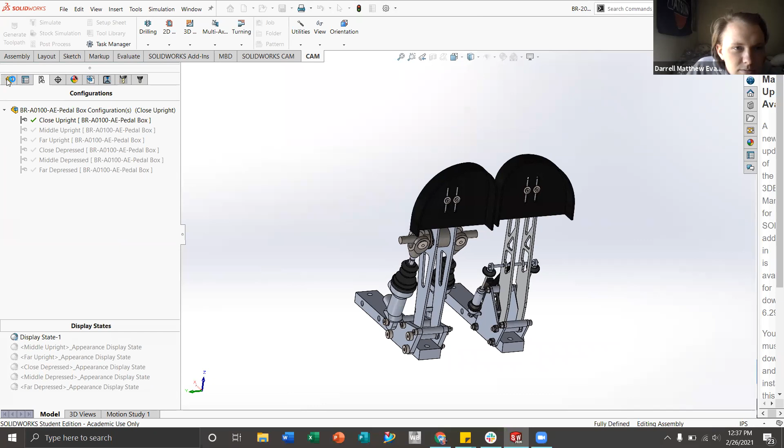I'll let you guys take a look at this and see what we have here. It's kind of self-explanatory - you have on your right the accelerator pedal, on the left the brake pedal, like a normal car. Me and my team have been building this up over this year as well. We continue to develop it every year into what it's been. This right now is really nice.

What we have going is an adjustable pedal box. You can see these pedals themselves can be moved from the forward position to the middle position and then to the rear position, as well as with the brakes. Then these will be attached to a floor that then goes in the car. That's a pretty cool thing we've done as well. You can see it gets very complex, so you get a lot of hands-on experience with this club.

So I'm just going to go ahead and close that up, and then open our new assembly. However experienced you guys are, this is the basic window of SolidWorks right here.

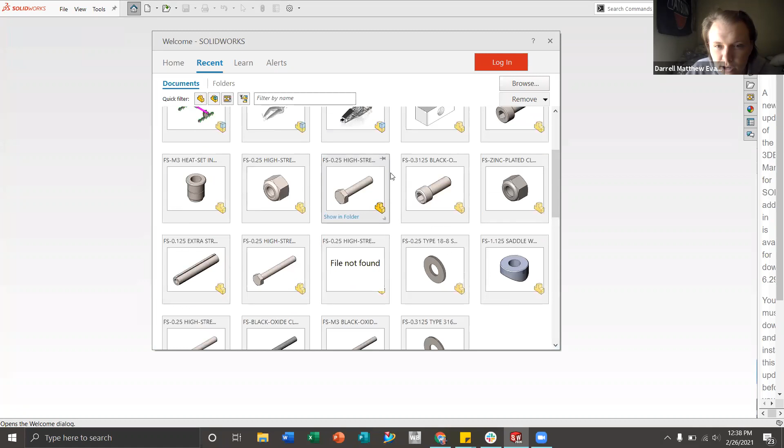You have a little bit of some tools as well as some management stuff as far as SolidWorks goes up here as well. If you hit the home button, it pops up - usually this is the window that loads up. You have here, you can go to recent to see all the recent things that you've done, and then there's alerts and some other introductory tutorials you can see here.

With this, I'm just going to go ahead and close this. Then in this guy, you can make a new part or assembly. If we go ahead and hit it, you have a new part, assembly, or drawing. These are sometimes really good to use if you're creating something new and not making it of an existing assembly. An assembly is just a collection of parts - that's all it is, you just put it together, and we'll go through that a little bit more.

Now what I'll be doing is opening the steering assembly. This is the other kind of assembly that I work on. As you can see, there'll be a lot of parts, but it's not too crazy.

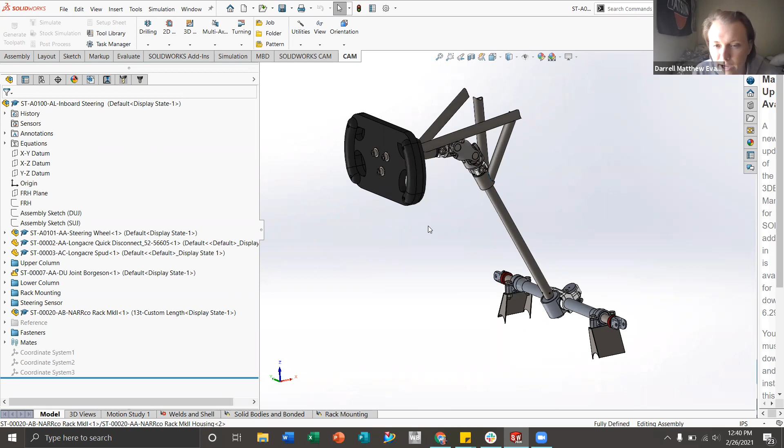This is a goal - we want to try to help you learn a little bit of CAD. If you are interested, you could definitely look at joining the team, and that's where we teach a lot of people. We're all trying to either get a job or progress ourselves as engineers, and CAD is a good way to do that, gives you good stuff for your resume as well.

So with that, what I'll be doing is going over how we build a U-joint assembly, as well as modifying this piece right here. I'll show you how we go about it - rather than creating new parts, we actually design within our assemblies, and that way it makes everything a lot smoother and nicer to work with.

To take a look at this, what a U-joint is - you can kind of see it takes the steering wheel, which I'll highlight for you guys, that's that guy right there in blue. And then we have our rack, which is down at the bottom, highlighted in blue as well. So what this does, obviously, as you turn the steering wheel, it'll then take - let me go ahead and hide this guy.

Go ahead and hide this guy.

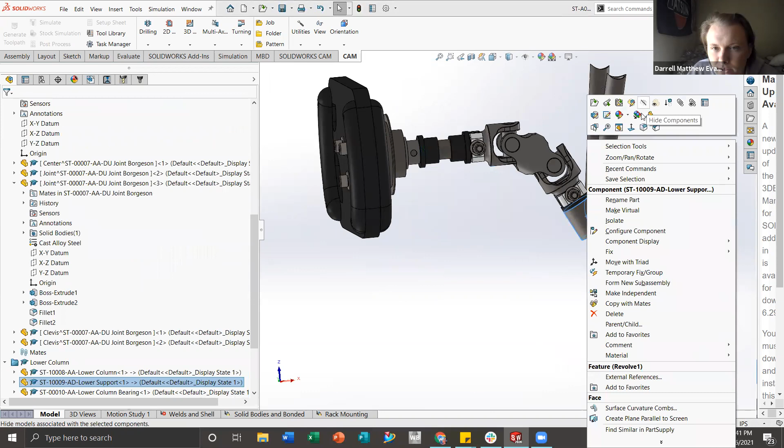So it takes this input shaft right here, which is connected to the steering wheel. It goes into this device, and this is called a U-joint. It takes rotation from one input and then it transfers that rotation into the other output shaft. And so the output shaft is here, it's connected to that U-joint, and then connected to what is called the

steering rack. And so then what this does is it will move left or right as you turn this, because it has a gearing system. And the gear is called a rack and pinion, and that's where it gets its name. It is a steering rack because of that type of gearing it has. And then it creates a linear displacement and will move the tires left or right to steer the car

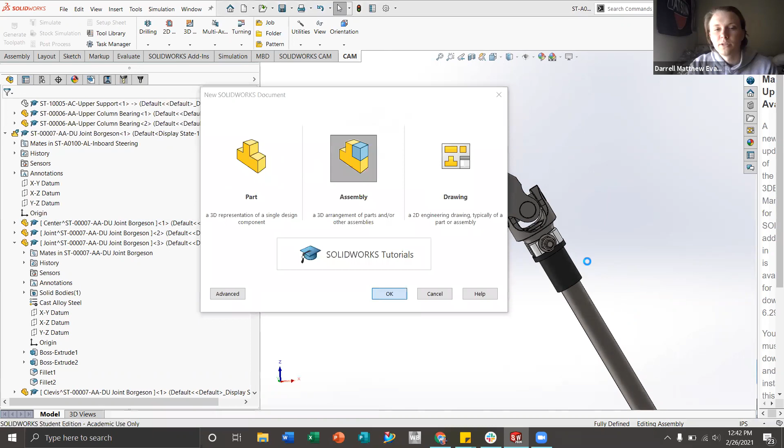in the desired direction. So what we're going to be doing right now is we're going to be changing up this U-joint a little bit into something just a little more different, just because we're going to be transitioning to something else. So with that, what I'm going to do is I'm going to go to new, and I'm going to create a new assembly because I already have these parts already created. And so this way I can show off some of the assembly portions of SolidWorks.

All right, so with this, sometimes it asks you to begin an assembly. And you can usually go through this and kind of insert some stuff as well as possibly create a layout sketch. But that's not what we really want, so I'm just going to go ahead and cancel that. And then now we're going to be left with this really blank template.

I'll go ahead and show these guys. How I show these planes is I right click on the plane over here and then hit this little eyeball which says show, so you can see here. And then I have these hidden on mine, so I'll just go ahead and show those. And then you can kind of see we got our X, Y, and Z.

These are a little bit different in the SolidWorks that you may have. Our team uses special text that then calls it the XY, the XZ datum, and the YZ datum. We do it based off this coordinate system. You can kind of see here at the bottom left, and we just do that. It kind of just makes everyone's CAD very centralized.

As well, if you want to rotate through different views, what you can do is hit spacebar, and spacebar will pop you up into this little square looking thing. And then say you wanted a view from up here, you can kind of see in the top right. Oh, here, I'll go with that. So this is an isometric view.

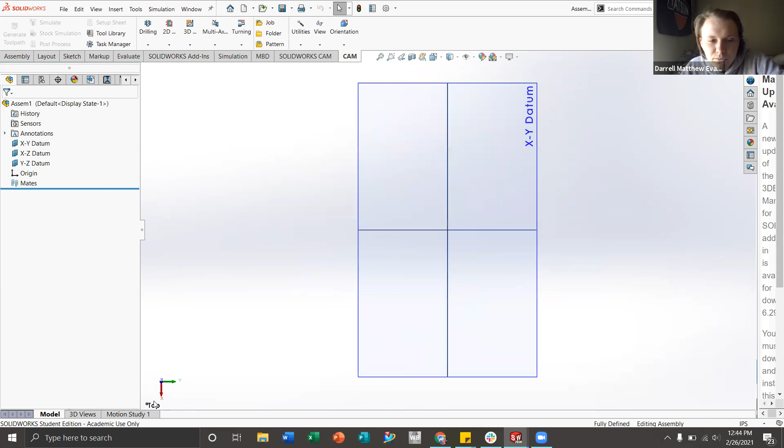As well, if you hit Control-1, you'll see in the bottom left we're at front view. Control-2, we're in the back view. Control-3, left view. Control-4, right view. Control-5, top. Control-6, bottom. And Control-7, which is isometric, which gives you that nice 3D view.

As well, if you use the middle mouse button, you can freely rotate around any part. And sometimes you might get a little confused, so you can always just hit spacebar and then pop to whatever view you want, as well as just hit Control-1 through 7 to whatever view you wanted.

As well, you'll see me zooming in and zooming out a lot. This is just your scroll wheel, so if you pull towards, you go closer, and push away, you go farther. As well, if you wanted to zoom on something over on this side, you would instead zoom towards that and put your mouse over there.

And so in case you're like, oh no, where'd all my stuff go, as long as you just hit Control-1 or 2, 3, whatever one you want, it'll pop you back to your main thing. And so with that, what I'm going to do is I'm going to start to build our assembly.

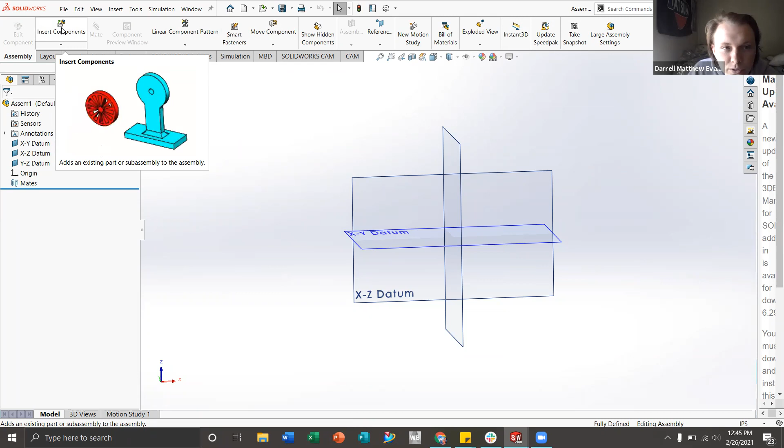So what we have are all these tabs up top, and these are for different things. Right here, assembly, this is the main tab. If you don't know what each of these buttons do, just hover over them and you can see, like insert components, which adds an existing part or subassembly to the assembly. If you go along, it shows you what it does. You can always undo what you did, so don't be afraid to just hit random buttons and see what happens. There's a lot of good stuff here.

Then layout, this is nice for a layout sketch. Sometimes you'll create a layout sketch which gives you an overall view of what you're building, and then you can constrain stuff and stuff like that. Then you have sketch, this is your normal sketch tool, and markup.

Evaluate. This evaluate tab is very useful in case you need to measure some things. I use this tool a lot. You can click two different things and it'll measure between them, and you can do center to center, minimum distance, maximum distance. There's some custom stuff, so there's a lot of different things this is useful for. You can get some dimensions off of CAD so you don't have to dimension in real life. Sometimes manufacturers will give you CAD but won't give you the actual part, so you can take that CAD and measure it, figure out you need 2 inches of space or however long it is, and then make your CAD based off of that. Then you manufacture the part and it'll have correct dimensions.

Another good one is mass properties, sorry, didn't mean to click that. This tells you the mass of whatever object you're making, and this is always important for us just because you need to know the mass of the car to determine a lot of other things.

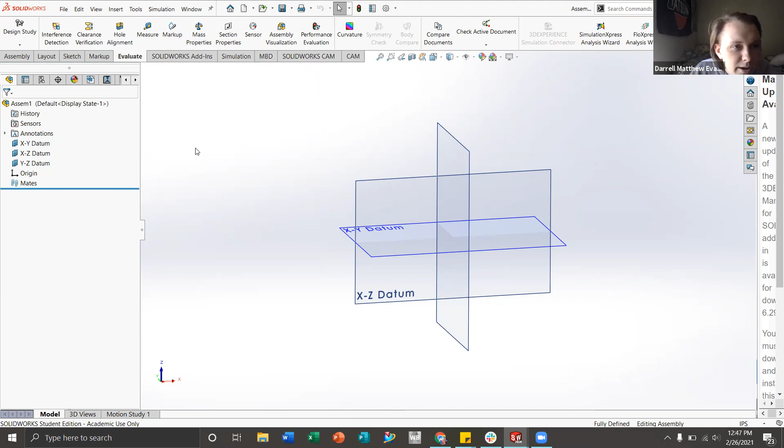So, yeah, we'll start getting into it a little bit.

All right, so what we're going to do is start inserting some components, so I'll go ahead and hit that button. Okay, there we go. Sometimes it might pop up some recent parts or other open documents you might want to input. But in case you don't see it, we obviously don't want to add this gun because that's our overall assembly, so that would not be too good. What we're going to do is go in and find the parts we want.

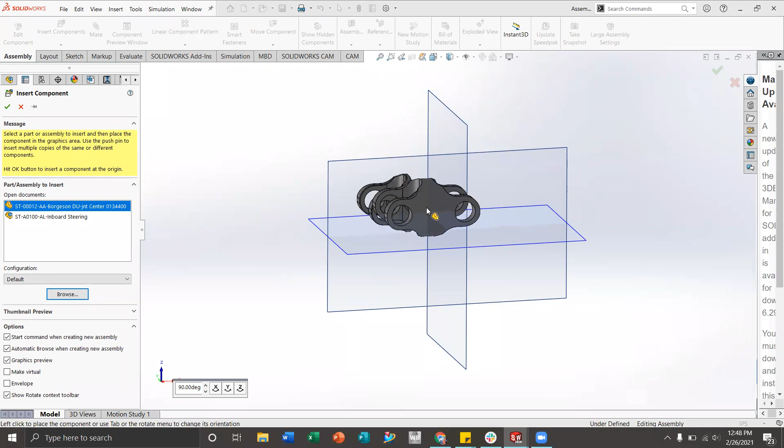Sure, I can just go through the list. So Rish, we kind of talked to you already, you're like a beginner with CAD, right? No, I did the class, ENG 6 I think, or ENG 4, one of the two ENGs. Oh, so I know how SolidWorks works, but I haven't done it for extremely large assemblies, stuff like that. Sure, okay. And then Divya, how experienced are you with CAD? You can type in the chat too if you want. Okay, maybe she's not here right now, but let's see. Tucker, how about you? Say that one more time. Sorry, I had to use the restroom. No, it's all good, how experienced are you with CAD? Oh, let's see, I can probably make a square with a hole in it, and that's about it. Interesting, okay, so we have a couple different levels of experience. So yeah Darrell, just keep that in mind when you're explaining things. Sounds good.

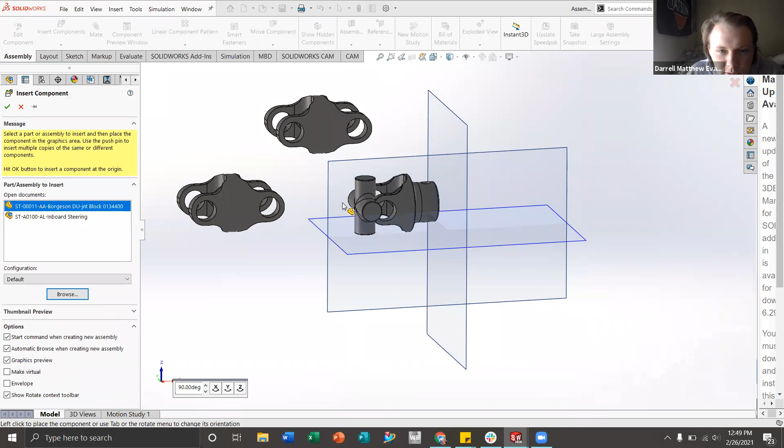All right, so now what we've got is I've just got some basic parts. I'm going to actually go ahead and delete those because I don't need those, I realize now. And then I'm going to need 2 of these. So what I just did is I inserted some parts using this insert components tool. Within ENG4, they do a really good job about how to create parts and stuff like that, and with that, I'm going to be starting with assemblies.

Assemblies are relatively easy once you get the hang of it, and you'll really understand it once you do it initially—then it starts to make a lot of sense. They can sometimes be a little tricky, especially when they get larger. I'll go into some more CAD based practices for making parts themselves a bit later, but right now I'm going to use some assembly work to show you guys how we do stuff here.

So within here, I just used insert components, hit that browse button, and inserted the components I needed. You can see this doesn't look like what I showed you before, and that's totally fine—I'm going to change it up and do some stuff. So I'll hit this cancel button, and now we can open this guy up and zoom in right here so you can see we have two parts total.

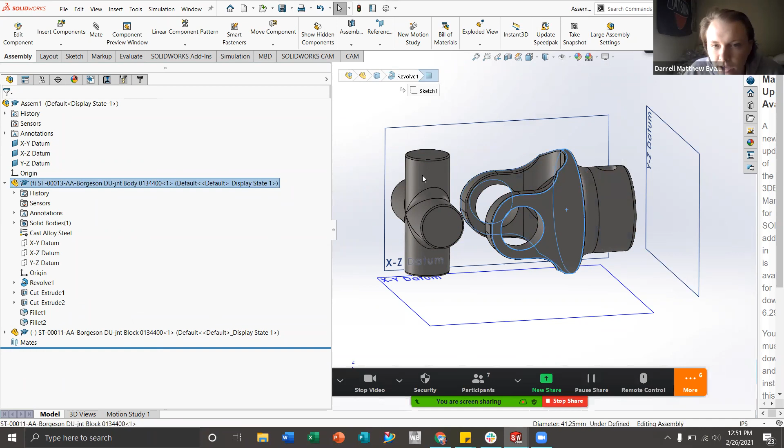What I'm going to do here is just select it, then hit Control C and then Control V, and it'll pop it right where my mouse is. You can see I can then move these guys around—they're not constrained anywhere except for this one, which is fixed.

So what I'm just going to do is go ahead and close it, and make this a little bit nicer. I'm going to drag this and move it below, so that way I've got my two bodies and then my block, which is this center thing right here.

Now what we can see is this F right here—we have this F and then this little dashed line. These are very helpful. What F means is it's fixed. We can see the origin is right here, so the origin of our assembly is right over here as well. You can see these are where our planes intersect, right along that origin.

Here, I'll go and show our origin here as well. Should be able to—there we go. Oh, that didn't work, okay, that's fine. So yeah, our origin's right here. We can see that's where all of our planes intersect, but that's not too good for us because we want the origin to be in the center of this guy.

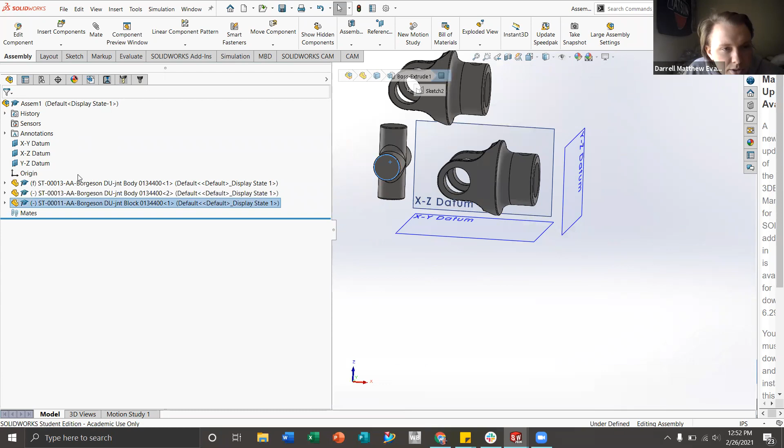So what I'm going to do is right click on our first one, and it pops up this very big window. This is very nice because there are a lot of hot buttons here. You can see we can open this part. If I go ahead and hit open, say this part wasn't up to spec, or I measured some different things and it was just a little bit different, it should open.

My computer is thinking. Okay, there we go. So say it was not up to spec and I just needed to change a couple things—I could possibly change it, and then I'd go ahead and save changes, yes, go back, and it would auto update as well.

Another nice thing—if we right click again, you can see 'open part in position.' So say you wanted to edit this part in the position it was in, you could do that. Or 'open drawing,' if I wanted to create a drawing for this, or if there was a drawing already attached to it, I could open up that. So say if I was manufacturing this and wanted to see the drawing someone created, I could do that really easily as well.

Another big one is 'edit part'—this one's really nice. Okay, I'm just going to—it's going to prompt me to save this, so I'm just going to save this.

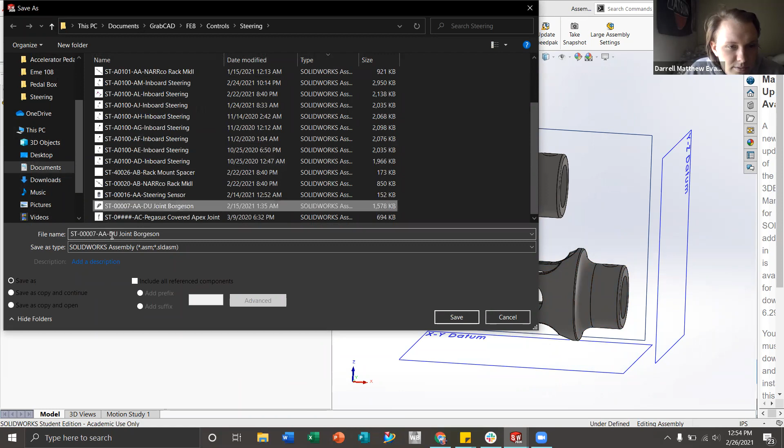Right, so that was just me saving the document. I gave it a name, and you can see now I updated the name right there. But that's not what we're explaining.

Now you can see in this top right, this button appeared, telling us we're editing the part currently, and it turned blue here too, meaning we're editing the part. We have some sketches and features that we've done to create this part, which I'll show off later. Just know that we can edit the part from here, make changes, and it would actually update within the assembly. That's pretty nice.

So I'll exit out of that. Now I'm going to show this button here, float. What float does is it basically unconstrains the component. First this component was fixed, but now we can drag it around and put it wherever we want, depending on where we need it.

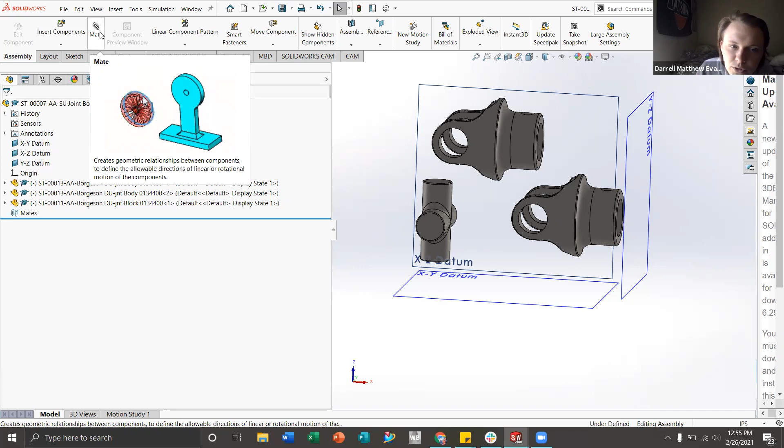So in an assembly, we inserted our components. Now we can go over to this button, mate, which creates geometric relationships between components to define allowable directions of linear or rotation. So when you go to move a component, if you hit that little drop down, you have move or rotate. Right now these parts are just floating, so I can rotate them.

You might want some rotation, say if you want a part to rotate and have that ability, so you might not want to constrain it fully. But normally you want a fully constrained assembly, since it's generally good practice to fully constrain your things. This little dash mark means it's not fully constrained, meaning it can rotate and move.

So what we're going to do is, since I want this guy on my origin, as this is the center of my assembly, I'm going to select the origin here, then hit mate, and mate this to the origin of my assembly. Now you can see we've moved, and that origin is right along that origin.

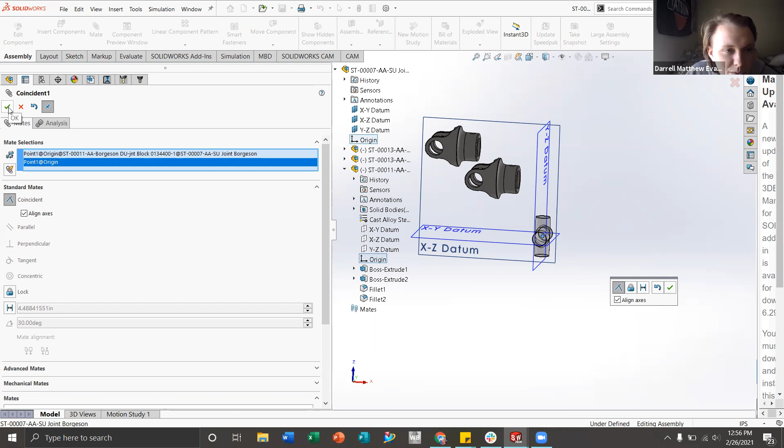Sometimes you might not want to align axes, you might just want to align the origin itself and let it skew. But in our case, we're going to align those axes because that's what we want. So I'll hit OK, then hit this check mark to get out of the mate window.

Now you can see that dashed little line is gone. As we move this, it says the selected component is fully defined, it cannot be moved. That's perfect, that's what we want, that's what we're looking for. I'm going to close that window.

Now this part is good, but this other one, we're going to want them right about here, then I'll need to rotate that and some other things. This is a lot closer as well. Under mate, we now have the mate we added, which is a coincident mate between the Borgeson DU joint block, this guy, and the origin.

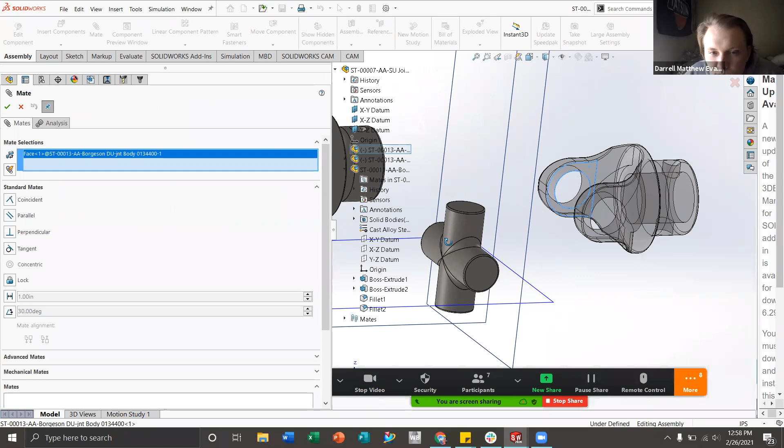That's good, now we're going to add some more. First we're going into mate. Oh sorry, I didn't explain all the mates - my bad. You have standard mates here: coincident, which means something touches another thing. So say you wanted the inside wall to touch right here.

Granted, I kind of messed that up there, sorry about that. So say you did what I did, you clicked something you didn't mean to click. What you can do is right click and clear all the selections, or if you just wanted to select something else, you can hit delete and still have that one face selected.

And then now we can select this face that I was going for. And so you can see now it's coincident. So if I wanted this mate, I would hit OK and then hit check mark again.

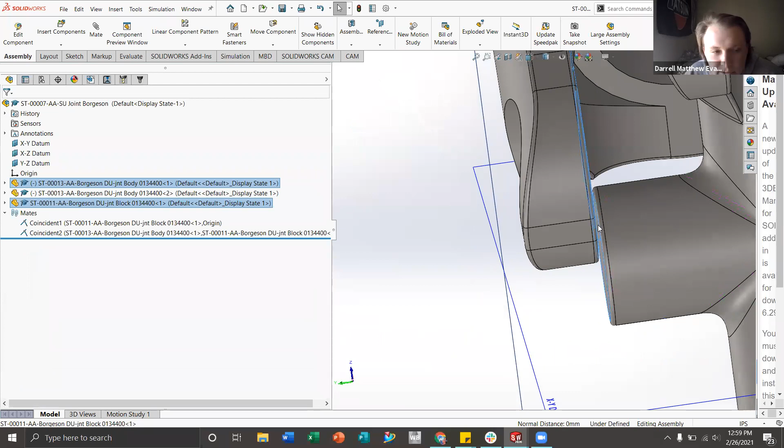Now what we can see is if I tried to rotate this component, say you went like this and rotated it, we can only rotate it along this axis because this face that we mated is geometrically constrained to always be touching this face, which you can see right there. But that's what I want.

So what we can do is right click this guy and hit delete, and then yes. So now we can see it's back to being unconstrained.

So now what I'll do is go back into the mate. So that is coincident, now we have parallel. Say you wanted to make this, I find is pretty good. What you can do is open up these folders or this drop down menu right here, and then we can select the different planes of each part itself, and then you can make those coincident to either other planes or other things, or you can make them parallel or different things like that.

So with that, what I'm going to do is click this guy, and we can see that's the XY datum of that. Now I'm just going to move this real quick so I can get access to that. I'll move you guys back down. And what I'm going to do is make these XY datums.

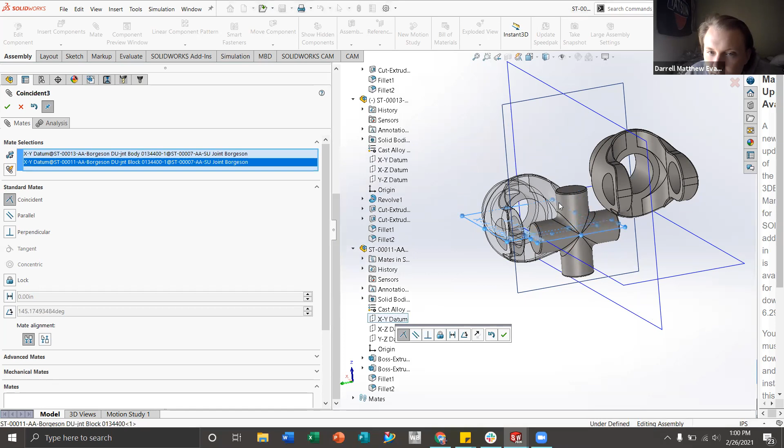And normally it'll snap to whatever we use. As you can see right here, I'm using coincident, or well, I'm not, but SolidWorks tells me coincident should work. And you can kind of see these two planes are touching each other, and so that should work.

I could also use parallel in this case. And as you can see, what that does is it doesn't necessarily line it up, but instead it just makes both these planes parallel to each other. As well, perpendicular, very similar thing - it literally makes them perpendicular. So now you can see they're kind of standing up.

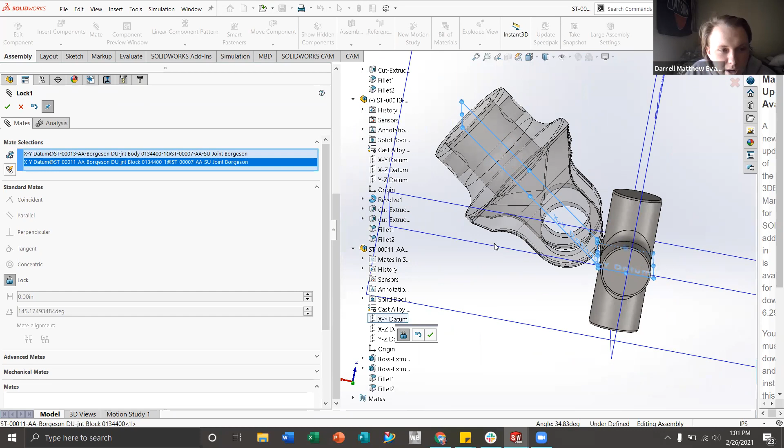And then if you have lock components together, what this does is it'll set whatever angle this was at relative to this other plane - it'll lock that angle in and always keep that information. We don't necessarily want that, so we're going to hit X on that.

And then we're out of that. Oops, and so we'll go back into mate because I accidentally exited out because I didn't want the lock.

Another thing you can do is tangent. So if you select a circular object, which is that, and then a flat object, like here, you can kind of see, it's a little bit hard to see, but it's tangent right there, so it's resting on that outside face. Sometimes that's useful, other times it's not so much, but yeah, that is a good one. So that creates a circular face and a flat face and gives them a geometric relation there.

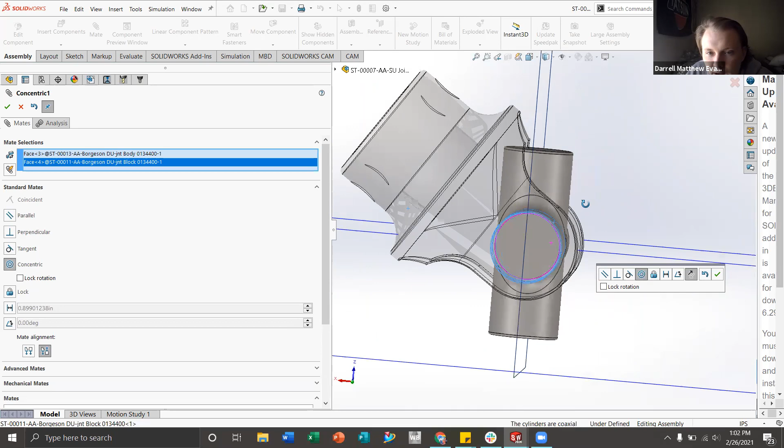So then we'll go ahead and clear all those selections. Another one is concentric - we're actually going to select that concentric. It takes two circles and puts them right in between each other, so you can see these pieces are aligned through that axis right there. If you drew that right along the center through that, they're lined up on that axis because you have those two circles going into each other. So yeah, that's pretty nice.

And then the last couple ones, we have this distance one. So if you hit distance, you can kind of see what this does is it'll create like a little circle - technically this will be our radius. As well, you can see there's different things, so if we did a center to center distance, and then set this to, you can put this at whatever distance you would like.

Say you wanted half an inch, so if we did 0.5 inches, you could see that is half an inch away from the center. You could also do custom - you could do minimum distance is half an inch. You can choose a lot of different things to get that specific geometric constraint that you want.

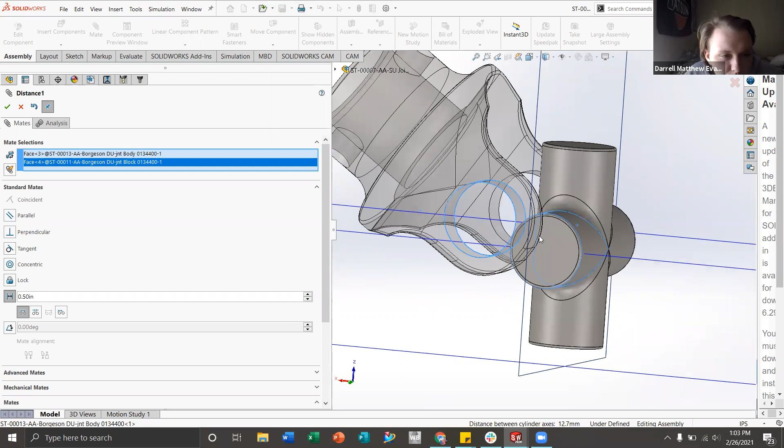But in this case, I'm going to go for concentric because I want it lined up on that axis right there. So we'll go ahead and hit the check mark there.

And then the last thing is we have an angle. So say you wanted to, we'll go ahead and select the planes again, the XY and the XY for this guy. Say you wanted to add an angle, say 30 degrees. So we'll go ahead and hit 30 and hit enter. And we can see now it aligns it at 30 degrees between those planes.

And so that might be useful. You can also, if you hit flip dimension, you can kind of see it flips it the other way. So that might be useful.

As well, this does require a reference entity. So I would probably choose... you just have to make sure you choose a reference. Oh, actually you don't. Okay, cool. So we'll go ahead and check mark those, and then we'll check mark again to get out of everything.

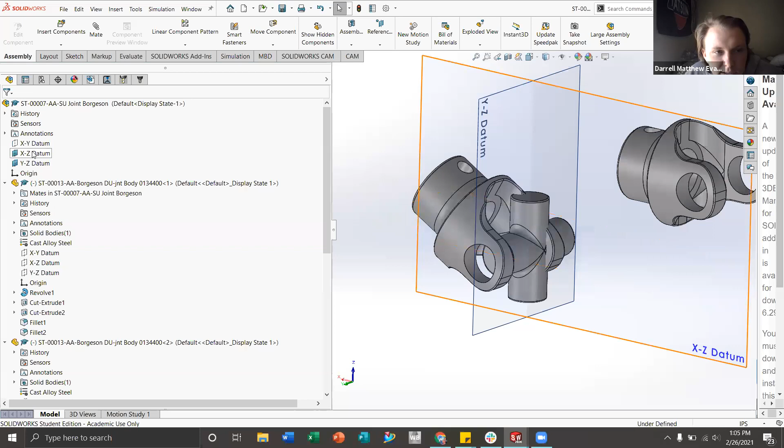And then I'm just going to hide these planes because they are kind of in the way. So what I did, I used this eyeball, and this can view planes or unview planes as well. If you just hit view planes and you see these but you don't want to see them, you can just go over here, right click, and then hit hide. And I'll just go and do that for all the planes. And it's always good, you always want to hide your sketches.

You can also see here, this sketch right here. If we were to go ahead and show it, you can kind of see how everything would get kind of cluttered. So it's always good to hide your sketches if you don't need them for referencing or anything like that. So I'm going to right click on it and then just hit that eyeball, hide, and it'll do that.

As well, you also saw when I show it for this part, under this part, since these two parts are the same, when I did show the sketch on one, it actually already updated the other one. So that's a nice feature.

It can also cause you a little bit of difficulty, just because say you wanted to make this part different from this one, well, you need to make two separate parts. So you just got to be conscious of that.

So yeah, with that we can go all the way down. We'll go ahead and close these guys up to make it less cluttered. As well, we'll go ahead and hide that sketch as well to reduce clutter. We can see we got our one mate and then our second mate and then this angle. I don't want this angle, so I'm going to go ahead and delete that guy.

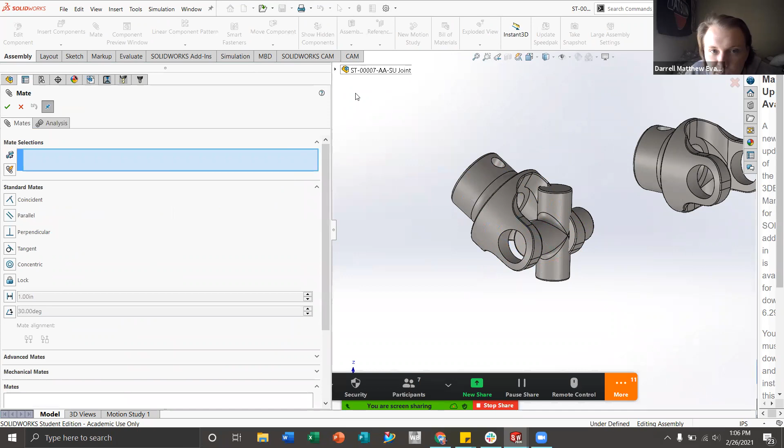And then I'm going to go back to our mate and I'm going to create a parallel reference between this guy, the XY, and the XY. I'm going to go ahead and create parallel. There we go, check. And then as well, sometimes a very nice feature is the symmetric mate, or there's some other ones in the advanced mates.

So these standard mates, you have what I just listed. They're obviously relatively standard, they kind of make sense.

So now what we're going to do is go into advanced mates. So here we have profile center, so you might want the center of something to align with the center of another thing. This one I don't use too often, but you can do that. And then you can add a dimension. Obviously 0 inches will have them be touching, but you could also add a custom offset to whatever distance you would like.

Symmetric, this one's pretty nice. What this does is it'll take two different things. So you could take this face and this face right here, and then we could choose the plane which it needs to be centered around. And so we could do it that way and make it obviously nice and symmetric and in the middle.

As well, another one is width. So I like to use width a lot because I can take these two faces, as well as in these tab selections, I can then select this one and this one.

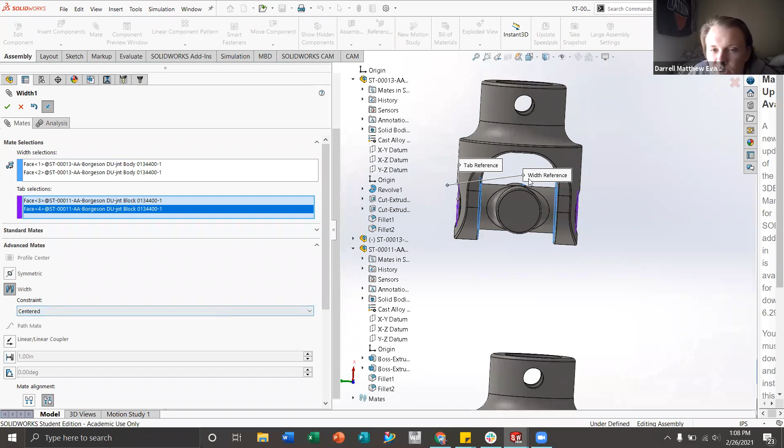And what you just saw is it moved all that to be centered between these. As well, you see how it has different constraints depending on how many things you select. You could either add it over to the right, or there's sometimes other options, but I use this for centering things a lot.

And so you can kind of see now everything's looking really nice and centered. As well, oops, scroll too much. Sometimes we'll go ahead and hit the check mark because I want this guy.

So we'll hit check. All right, then we'll go back into the mate so I can show you guys some other things. In the advanced mate, you can see path mate, so possibly if it travels along a path and you want it to mate it to that path, you can use that. I've never actually used path mate before, as well as this linear coupler, but if you obviously need those, you can do that.

As well, limit distance - if you wanted to have your part be flexible, which this will be, and you wanted something to move but you only wanted it to move a certain distance, it can only be within 1 inch. So you could hit that, and that way it'll allow it to move, but once it hits that 1 inch radius, it won't move any closer.

As well, there's a similar thing to limit angle. So we're actually going to be using this, where it actually limits the angle of this part to only be a certain amount. So that's those advanced mates.

Then you have mechanical mates. So these are sometimes nice. If you have a cam, which is like a little lobe kind of thing that rolls around, you can use that and it'll create that movement. As well, if you have a slot, so if it moves within a slot, you can assign that mate. Hinge - pretty self-explanatory - if it moves on a hinge, you can do that.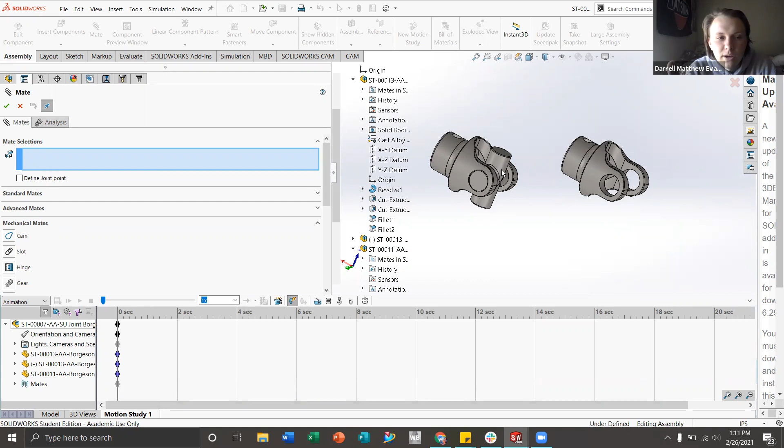And these mechanical mates, these ones are very nice, more for your motion study. So what you can do is have a motion study. For example, in the steering system, you could create a motion study to where if you rotate the steering wheel, this will then cause a movement between the rack, which you might want to see, as it should be relatively interesting.

All right, so that kind of goes through all the mates. I'm just going to hit the check mark to get out of that. And then in this bottom window, we might have different setups, so you might be doing some different things. You can kind of see there's model, 3D views, and motion study tabs. If you just hit model, it brings you back to the main window, and that's what we mostly use to look at all of the modeling stuff.

So now since we added all of these mates, you can now see that dashed line we had for this one is now gone. And we can see when we try to move it around, it doesn't move. So that's perfect because we don't want this to move.

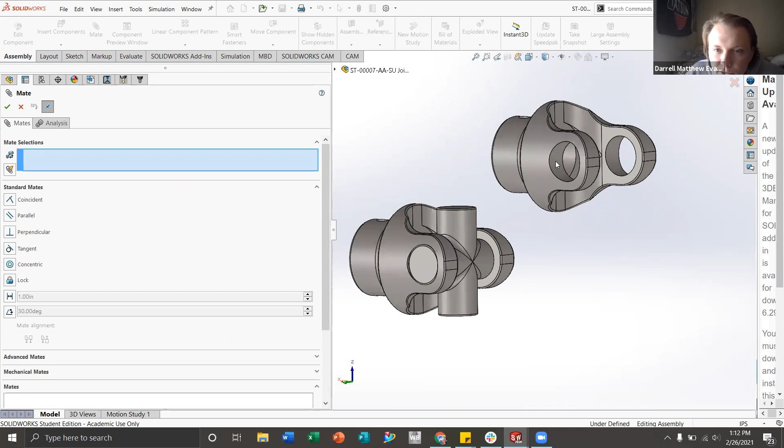So now what I'm going to do is hit mate, and we're going to go through this other one. I'm going to go ahead and hit a concentric mate. Sometimes you might see that this is lined up like this, but you might not necessarily want that. So what we can see is we have mate alignment - if I go ahead and hit it, you can kind of see it flips it around.

So in this case, it's not necessarily what I want, so I'm going to go ahead and keep it like this. Boom, boom. And then I'm going to go ahead and hit the check mark there. And now we can see it's starting to look a little bit more like what we want.

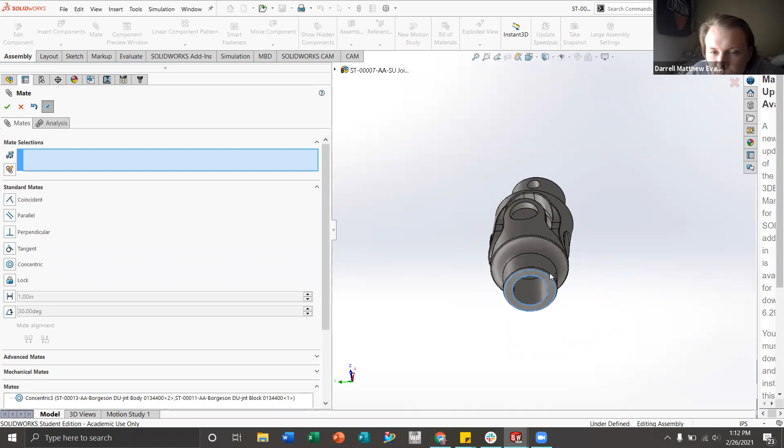And there we go. You can kind of see we have a little bit of movement, but we still see it goes up and down. So with that, I'm just going to drag it down here to give myself better access.

And then what we're going to do is a similar advanced mate, and we're going to use that width that I used. So we're going to go ahead and select this guy, those interfaces, because I want those interfaces to be centered between the outer faces here. And there we go.

Now it's centered. And so when we hit check, we kind of see we have now this thing that can move like that, and that's the only movement we have here. So obviously we can't have something like this or like that.

So what I'm going to do is use that limit angle. Limit angle, I'm going to use 30 degree, or actually, yeah, we're just going to keep it like that.

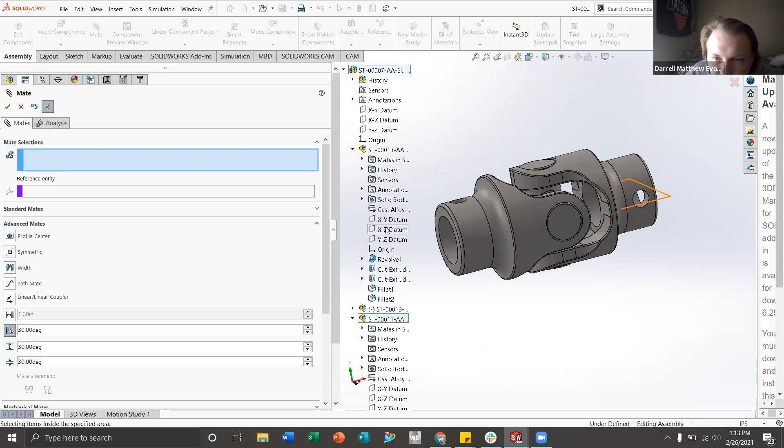And then I'm going to take the XZ and... oops, I want this one. And the XY, oops, okay.

So what I'm going to actually do is I want 180 plus this. Maximum, minimum. Yeah, so we want 150, and then our maximum to be 180, 210.

All right, here we go. I only want 15 degrees on both sides. So what I'm going to do is obviously I want these on the opposite side, so that's 180 degrees. And then if I subtract 15 from 180, I will get 165 if I did that correctly.

And then on the other side, actually, no, I lied, sorry, I want 30 degrees. So 180 minus 30 is 150. And then for our maximum, we want 180 plus 30.

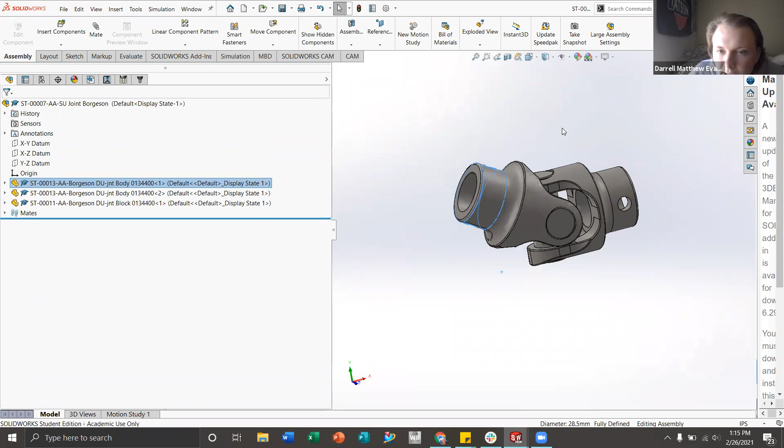There we go. And so what we can then do is we'll hit check mark there and check mark again. And what we can see now, the nice part about that limit angle is this will actually have some movement on it, but what we can see is all of this is defined. So now SolidWorks knows that it's all defined and it only can move within this angle, which is super cool.

So that is a little bit on the more advanced side as far as assemblies, but I hope that gave a good overview there. So with that, we now have this really cool part that works and has some movement on it, which might be a little bit different, and you can implement that into a lot of different things using either the advanced mates, which gives you that distance, or the limit angle in this case.

So yeah, I'm going to go ahead and just hit save, and then save all. And there we go. And so now we have a working assembly like this, and it looks really nice.

So as far as the assemblies go, do we have any questions there? Did I go through anything too fast? I might have, and that's okay. Also, open up the chat. Oh, I cannot see the chat. Rip.

Yeah, Al Tucker asked a question in the chat: how come you don't use rack and pinion for the steering column or for the steering wheel?

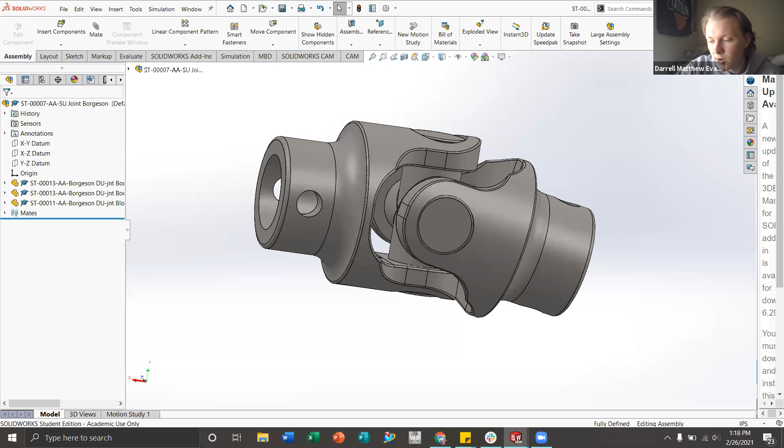Thanks, Darrell. You're welcome, Tucker.

All right, so I'm going to jump on over into our other assembly, and I'll go ahead and close this guy up. And so now I'm going to...

I'm just hitting show on all this stuff so you can kind of see the full assembly. And then what I'm going to be doing is first removing this part.

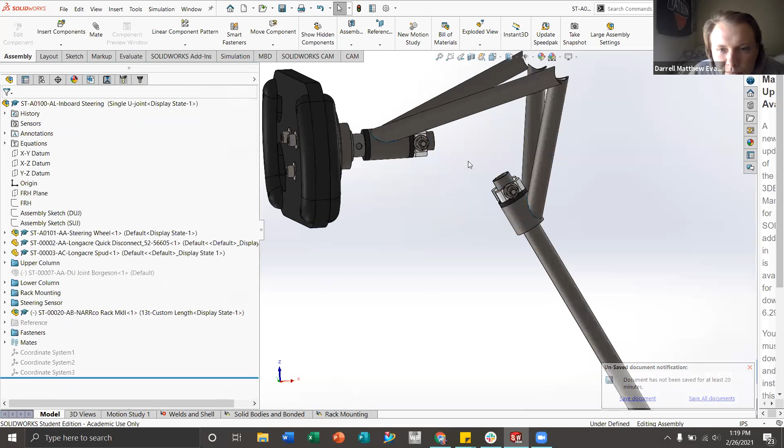I'm going to go ahead and suppress this. And there we go, we can kind of see it is suppressed. We're going to go ahead and suppress this guy as well, and suppress that. Okay, perfect. So you can kind of see I deleted a lot of stuff, but that's okay. We're going to be changing it up within this seminar.

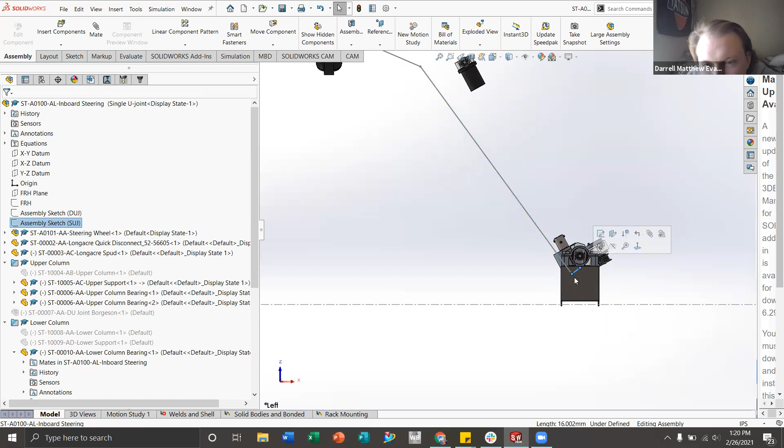So what we're going to be doing is I'm going to show you a sketch. If we hit Control 3, we get a nice side view. What we can see is we have 3 lines - a line there, a line here, and a line here. And our rack will actually be positioned around this line right here.

So, under mates. I don't want to do this about this one. Sorry about this. I just want to make sure I can do this relatively quickly.

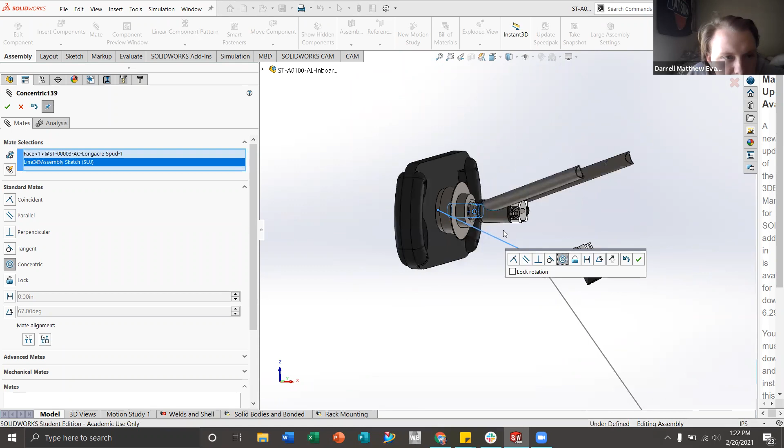Slide. All right, now let's... No, it's not letting me. Okay, that is okay, she won't do that. Okay, so this was working a lot better than my head. That's okay, let's press that. All right, there we go.

So what we're going to do, we're going to insert components, and then it'll pop up this window, and then we're going to find where we just made our new part. There we go, found it. And we can see we're going to put it in like that. Boom.

All right, now it's in, and you can see all the way at the bottom we have the part that we just made, and you can kind of see it's all fixed within here. So what I'm going to do real quick is make it flexible, which gives it the ability to move, like I just mentioned. It's right here, make subassembly flexible. So we'll go ahead and do that.

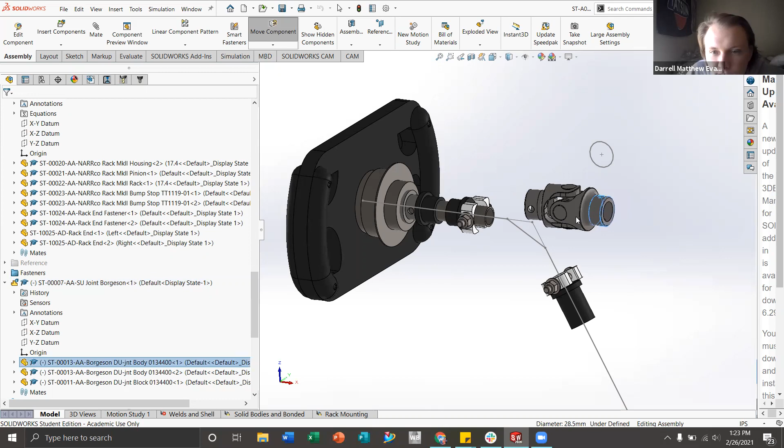Now you can kind of see - oh, I don't have it constrained very much, so you can't see the movement that it gets. So what I'm going to do is take this guy, take this guy, boom, boom, boom, yeah, and then... all right.

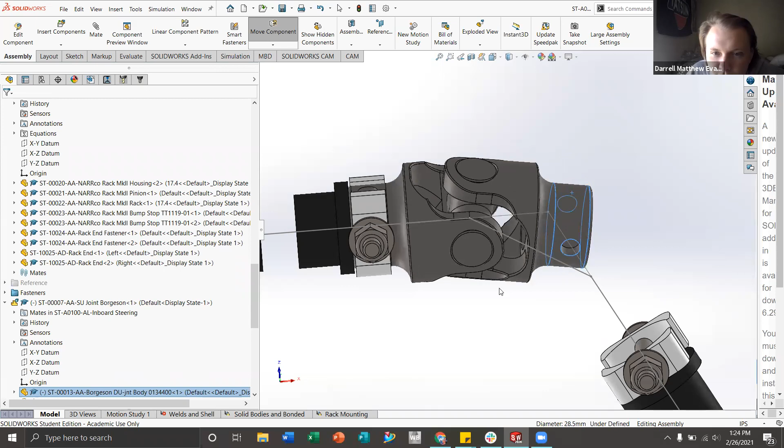All right, so now you can kind of see, if I go ahead and hit the check mark there - I just added a couple mates, and now you can see it's almost in the assembly where it'll be. We can kind of see it still rotates, so it has that rotation, and we can see it's able to bend a little bit, but obviously the rotation is kind of messing us up there.

So I'm going to go here. The nice part about mates is you can click here and see we have edit feature, suppress, as well as replace mate entities. So say you're replacing a component, you can hit replace mate entities and change it that way. You can also hit zoom to selection - in this case I was too zoomed in, so it zoomed out, but you can see what you selected.

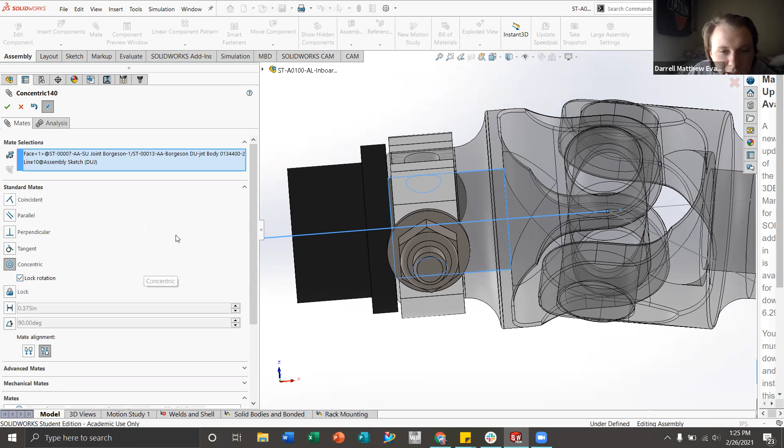What I'm going to do is hit edit feature, which allows us to change what we want. So I'm going to change it to concentric, and then hit lock rotation, which locks the rotation in so I can show you guys this. Now what we can do is take this guy, and you can see it moves because we have that limit angle on there, which is super nice.

So what I'm going to do now is right click. The nice part is, if I wanted to unlock the rotation, I could go back into edit feature and go through all that. There's also a button right here, unlock rotation, so I'm just going to go ahead and hit that.

You can also see we have flip mate alignment. So if I hit flip mate alignment, you'll see it rotates or swivels around. That might be a useful feature in case something's not lining up like you would like. You can go ahead and rotate that around, but I'm just going to flip it one more time. There we go, now we got it flipped, it's lining up with everything, but it's not exactly where we want it just yet.

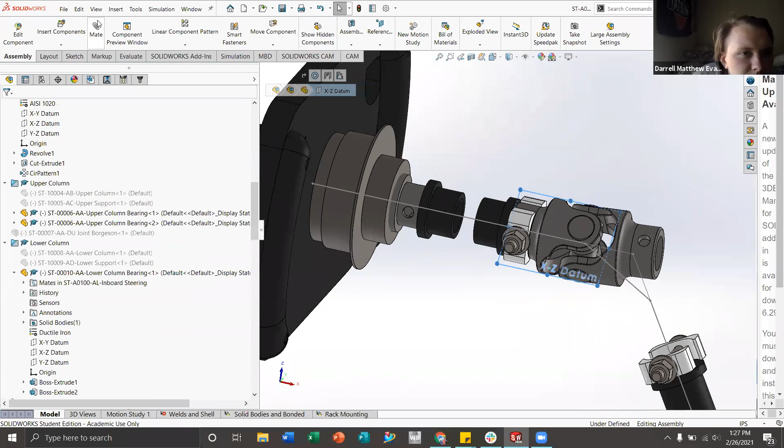So I'm going to go ahead and take this guy, go ahead and hit mate. Then you just kind of got to look at the parts you have, and make sure you line it up correctly. So we're actually going to take... where are you? We're going to take that guy, and yeah, that looks good. I'm going to go ahead and check mark.

And now what we can see is how it rotates on that, like that, which is kind of what we want, but also not what we want, because if I hit Control-3, we can see I want it to bend along this line right here.

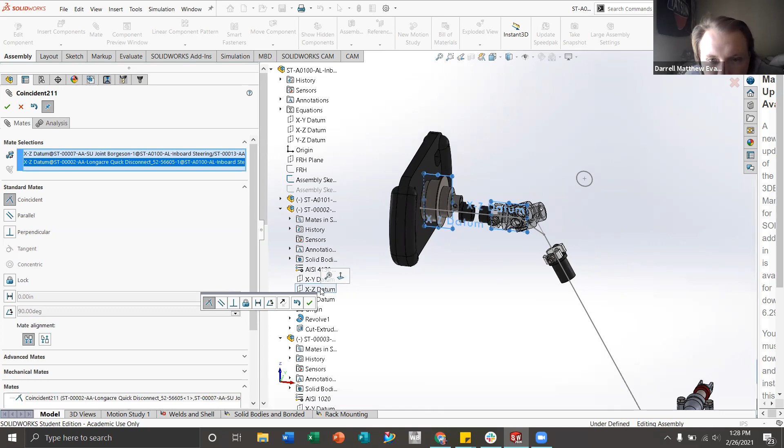So instead, we're going to go all the way down to our mates, we can see we just applied that one. I'm going to go ahead and edit this guy and realize that I don't want the XY, so I'm going to go ahead and delete that one. And instead, I'm going to take our XZ, and that should rotate some stuff.

All right, check. And then we'll hit check mark again. There we go, and now we can see we have it and it rotates like that.

So we can get it to rotate in whatever angle we would like as far as it goes. The nice part is on the manufacturer's website, it was limited to 30 degrees of bend, and so that's obviously why I set it to 30 degrees. You can see it goes up 30 degrees or down 30 degrees, and we kind of have that line running through, which doesn't look to be 30 degrees like that much, but it's relatively close. So that's kind of how we put it into the big assembly.

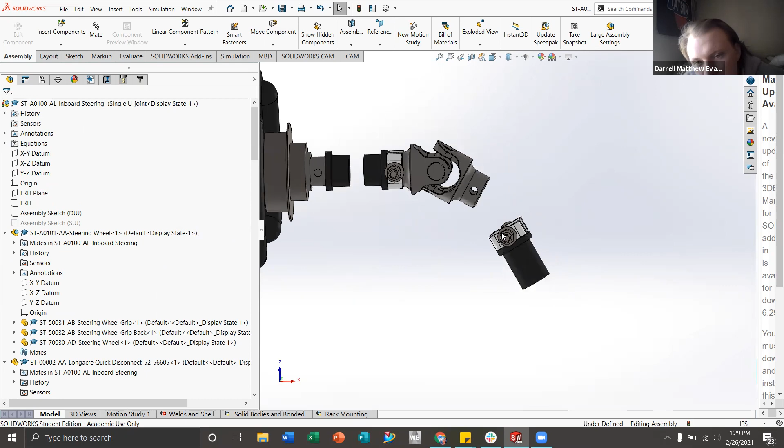I'll go ahead and hide this front sketch just because it's a little in the way. So now we can see that. And since this hasn't been updated just yet, there's a lot more work that needs to go in to mate these parts up and kind of get everything fitted.

What I am going to show though is right here, I'm going to be CADing. We'll go ahead and show our upper column as well. Where are you? So we can see this column, it gets supported by this bearing, and then gets attached to this bar that goes across.

We can see the pattern of that bar if we reference. We can see, so this bar is a part of the car, and so that's how this upper portion gets attached to what this is called, the front roll hoop. It gets attached there and it gets welded.

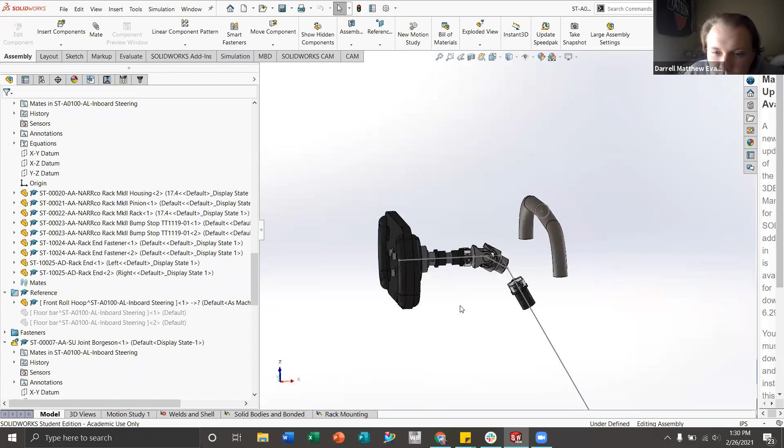So what I'm going to be showing here is how we go about creating parts within assemblies, which in itself is already a good skill to have.

First, I'm just going to go ahead and hide this sketch here just so it makes things a little bit easier. Then, instead of insert components, a nice part is you can hit that drop down right there, and then you can create a new part or assembly, or you could copy a part with mates, because you might be adding in a lot of screws or stuff, so you just want to copy and paste and make it a little bit easier for yourself. But the nice part is we can add new parts and assemblies within this assembly and then design it off there.

So what I'm going to do is hit a new part. And then you just got to hit check mark, it'll drop it in somewhere. And then we can see, I'm going to go ahead and close up all this stuff, so it's really easy to see.

All right, so now we can see down here at the bottom, we have our F, which means fixed. I'll go ahead and open this guy up. We can see our origin is exactly where the origin of the assembly is, so there's no difference because it's right there. And then we got our X, Y, Z, and the origin all right there with this part that we inserted. And now it's just kind of a regular part.

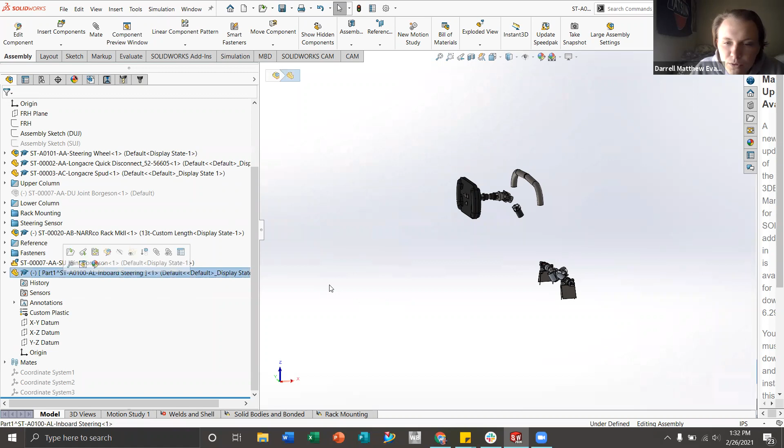Before we even start to design the part, I'm going to go ahead and move the origin of the part where I want it. I'm making a connecting piece that connects these two highlighted pieces together, and I would like the origin to be right in the center right here. It's always key to know where your origin is. If I just started designing and creating sketches without thinking about it, my origin would end up way down here when the part is already way up here, and that doesn't really make sense. That makes the origin really random.

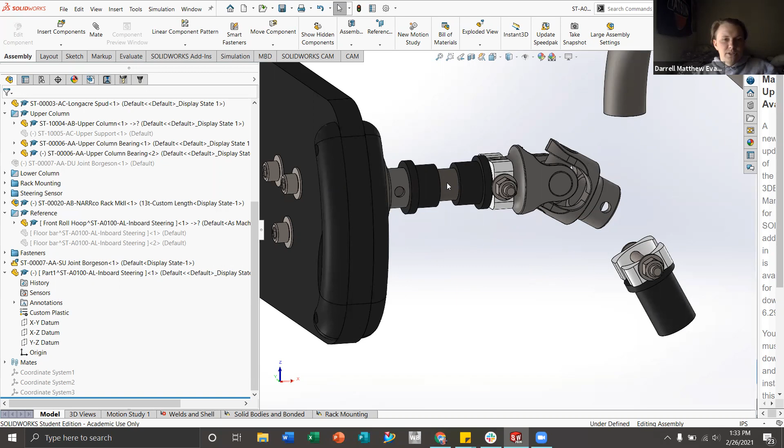So what I like to do is create a meaningful origin. If the origin is right in the center of where I want it to attach, that would be perfect. So I'll go ahead and select our origin, then hit mate. I've selected the origin, we can see the origin of that part. Then I'll hit that bar, and now our origin is kind of at the edge of that bar, because we have that coincident mate. Instead, if I do concentric, it plops it right in the middle. You can kind of see that with our highlighted things, and that's looking really nice. So we'll go ahead and hit that for check, and then hit check mark so I can select some more things.

Now we can see we have X, Y, X, Z, and Y, Z. So now what I'm going to do is place it right in between these two guys right here. I'll go ahead and hit mate, and this is where we're going to use a symmetric mate, so we'll hit symmetric.

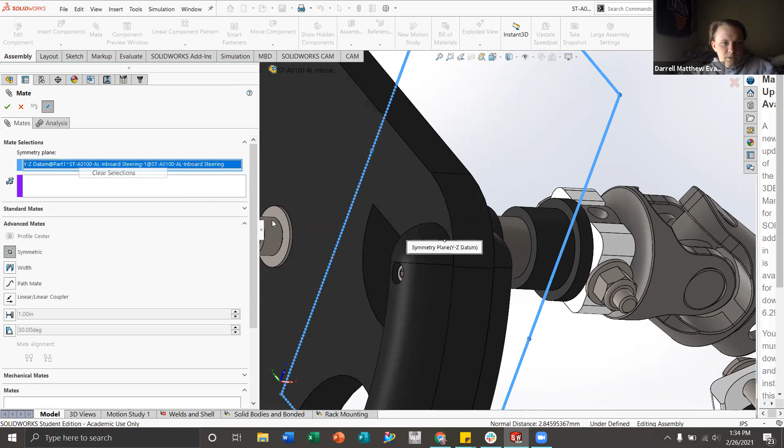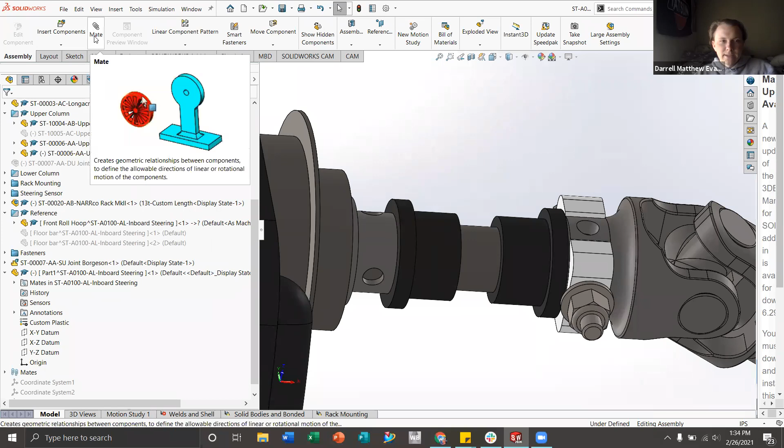So what I'm going to do is hit this guy, oops, and rotate it around and hit this guy. Sorry about that, my selections were kind of bad. Oh, oops, that messed things up. Okay, so we're going to hit X. I kind of messed up there, but that's okay, I just hit X to cancel out of everything so nothing broke.

I'm just going to go back into the mates, and we're going to go all the way down to the bottom. We're going to select that same plane, and instead this time I'm going to use width, just because that will work. Now we have the plane selected, I'm going to go to tab selections, so I'll hit that face and this face, and then we'll go ahead and make it centered, and I think that should work.

Oh, that did not... oh man. Okay, that is okay. Let's go ahead.

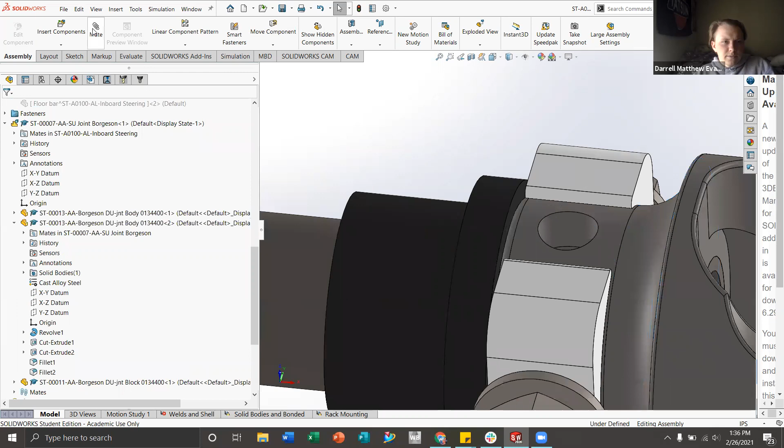All right, so what I'm going to do is just clean up some of these mates that I broke. I'm going to select that guy, check mark there, check mark. Now I'm going to go into mate. So now I believe the symmetric mate will now work. We'll go ahead.

There we go. Okay, now we can see we got that plane right in the middle. So I'll go ahead and hit check mark there and then check mark one more time. And now if I hit the origin of this part, we can see it's right in the middle, but we still have it unconstrained.

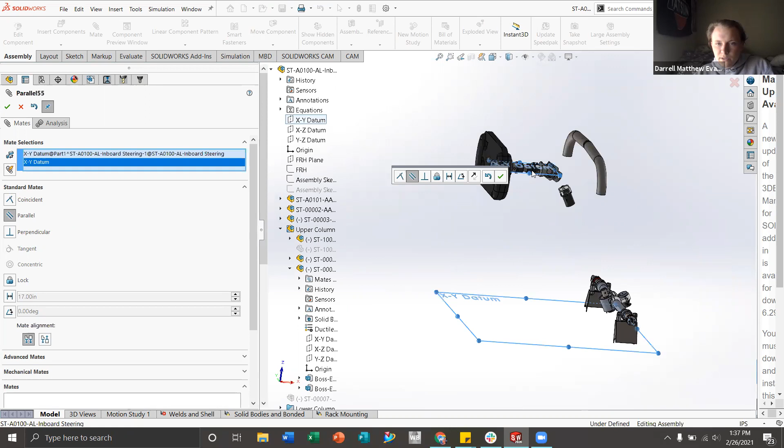So the last one I'm going to do is take our XY plane, and I'm going to scroll up to the big thing on top. We can see if I hit XY there, those are parallel. So I'm going to go ahead and hit check and then check one more time. And now we see the part is fully constrained.

So even though I haven't made anything, like I haven't made a single sketch, single feature, single anything, I already have a fully constrained part. This promotes good origin placement because now I have my origin exactly where I want it. I have my reference planes, which are these three planes, exactly where I want those, and I have it already placed within my assembly without even creating any part or anything like that.

So now what we're going to do is start actually making the part. This consists of a little sleeve that goes over here, and then we're going to have tubes that connect up onto this main part right here. We'll be using some different sketches and other things to create that.

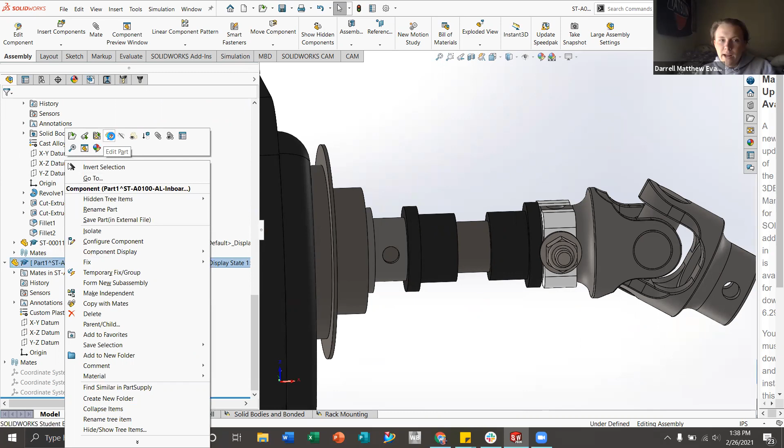All right, so first off we're going to go down to our part, right click and hit edit part. So now we're editing this. It's always good to see this in the top right corner to know that we're actually editing the part within the assembly. If you don't hit that, stuff you make will be done in the whole assembly and not as a part, so if you tried to export the part, you would get nothing. So it's always good to edit the part, that way you make sure everything is all good there.

So within this, how to create parts and different things, what you have is features. So my SolidWorks might look a little different to yours, you might not have as many tabs here.

And these tabs are really nice because there's a lot of different things you can do within SolidWorks. So if you find a tab here that you want to explore, or just want to learn what SolidWorks has, you right click any random tab, go under tabs, and you can see there's a ton of different things. So there's sketch, sketch ink, which lets you draw a little bit, looks a little like Microsoft Paint, structure system, mesh modeling, all this other stuff. I have most things selected, but I don't have all of them selected because I haven't used them. But sometimes there might come a time where you're like, oh, where is that button, and you might just need another tab to open it because you don't have the tab.

So there's a lot of different ones, but I recommend you can select all of them, but then again it does get cluttered. So I kind of select the ones that you need, and you can always add them in whenever. So with that, we'll go over these different tabs.

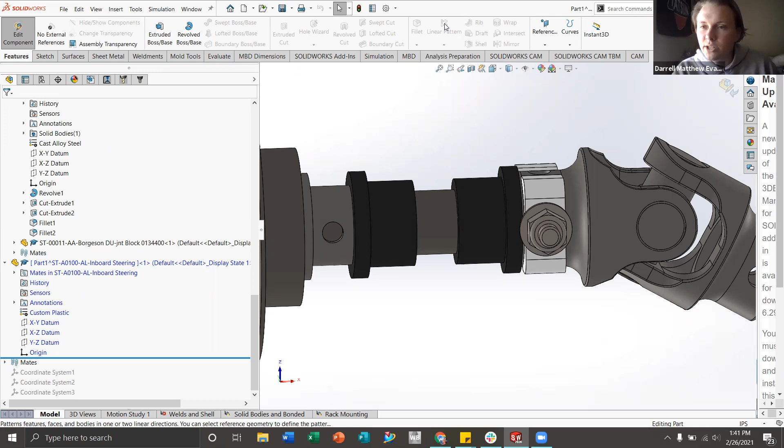And that's useful. Linear pattern - you can see if you wanted to create a hole 15 times, but you didn't want to draw 15 holes, this is sometimes nice. It also has a circular pattern, say you wanted a hole spaced out 60 degrees between a point.

So that is what I've used in here. You can see I have one hole, and then I rotated it every 360 degrees divided by 3, which is 120 degrees. So I rotated it instead of making each hole by itself.

So that's pretty nice. As well, rib, you can see if you need that, that's there. Draft - this is sometimes nice with other composite stuff that we use, this draft is nice as well, it just does a little bit different things. Shell hollows out a part. These are all very nice tools, they don't get used very often, but sometimes you might need to do this, and this is a good place to do it.

Another one, reference geometry - this is very nice. So we have plane, axis, coordinate system, point, and then mate reference. I haven't ever used a mate reference, but most of these - say I needed a plane, or I wanted to sketch on a plane that was off axis.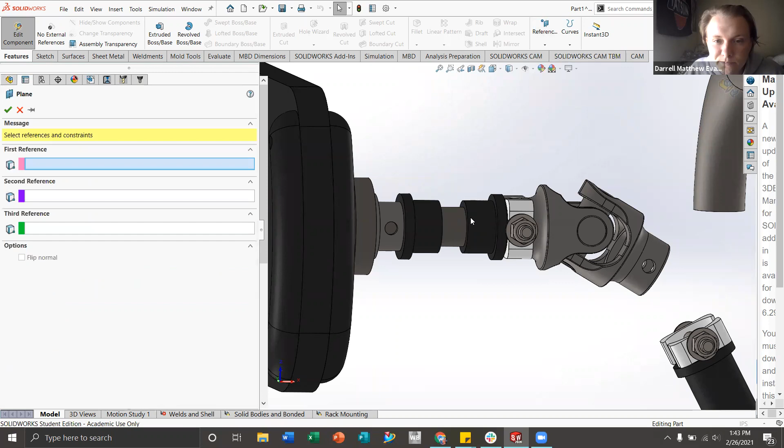So what I could do is hit plane, and since we're within this part, I kind of want to be operating within here, but say I wanted a plane that was 5 inches away from this plane. I can hit this guy, which means this is our first reference. Then I can go to offset distance and hit 5 and IN for inches. We click out of it, and now we can see it has a plane that's 5 inches away.

And say I wanted 2 planes, 3 planes, you could get a lot of planes depending on what you want. You might be doing what's called a loft, and a loft takes a profile and links it to another profile, another profile, another profile, and it kind of flows it all in between. So you might use this where you have a plane 5 inches away or whatever distance away.

As well, you can also say you didn't want it this way, you could do, oh I want it this way. Or say you wanted to do 2 planes and do mid plane - oh that doesn't work, but yeah, so that offset distance works, you can do that. As well, you have an angle.

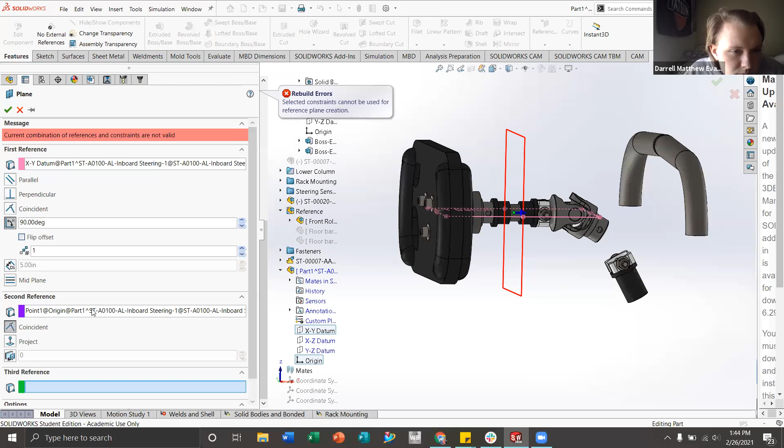What you can see here is when it gives you messages like this, you need to select more references in order to get this angle correctly. But say you wanted - I think I can select this. Yeah, so it also tells you when the current things are not correct. So I can't select this just yet because I need to have a line that it's based off of.

So yeah, I can't do an angle just now, but you can do a lot of different things. Say you wanted it perpendicular or parallel to a different thing, or distance, as I said, you can always do that. There's a lot of different options for the reference geometry.

And the reason why you might need this is, say you wanted to create all of these features right here, they work off of sketches, and a sketch you have to sketch on a plane. So if I wanted to sketch on this plane, I would hit this plane first, and then hit sketch, and now I'm sketching on this plane, and you can see all these different things pop up.

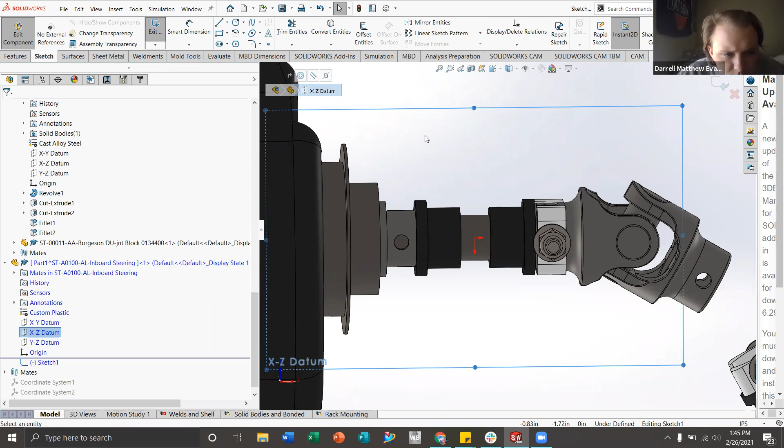So say you didn't want to sketch on one of these 3 planes, that's where this reference geometry would come in. I'm going to exit out of the sketch without saving changes. So that's where this plane would come into effect - say you wanted to create a sketch on a plane above, you could then do that. As well, sometimes you might want to create an axis, a coordinate system, a point, or other things that help later down the line for other things where you need that.

If you join the club, you'll have a lot of experiences of why you might need this and other references, but that's a little bit too much for now.

This curve is also a little bit nice. You might find a lot of bolts have this helix and spiral, because that creates the bolt threading. So that uses that.

There's another tab called surfaces. This surface tab is basically the same as the features tab, but instead it's all for surfaces. So you have extruded surface, revolved surface, swept surface, and the list goes on. This is nice if you're using a very thin material and you want to use only a surface which doesn't really have mass or a thickness, but instead it's really flat, and you can use it that way.

You can then thicken it at the end. So it all depends, as well as sometimes it gives you a little bit more freedom—say the extrusion is not working for you the way it needs, maybe a surface might work out for you a little bit better. There's a lot of different other tools, but yes.

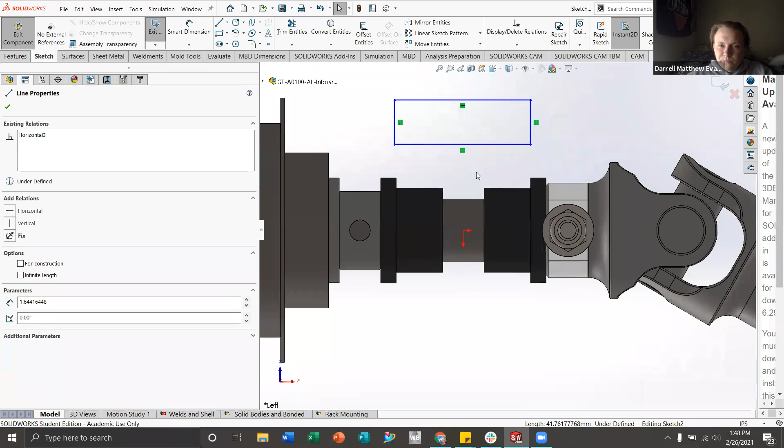If I hit view sketch relations, which is just under this eyeball—that's kind of your visibility window, so you can view different things—sketch relations is one of them. You can also turn it off because sometimes it'll get very confusing. But you can see it'll show me: horizontal. If I click it, it highlights this in pink, which shows me this line is horizontal, which is exactly what I want.

As well, in this you have line, circle, your different drawing tools right here. Trim entities is really nice—I use this a lot.

If I go to trim entities, there's power trim. This is nice because you can just draw around and cut stuff off if you like. Also, trim to closest is pretty nice—if you just click, it'll trim it to the closest thing like that. I'll go ahead and delete everything.

Convert entities is nice too. Say I was drawing and I want to have this circle pop up onto my sketch—I could hit the check mark, and you can see it created a line like that. So now I have a line here that I didn't even make, but it's already defined off of this surface. That can be very useful for some different things.

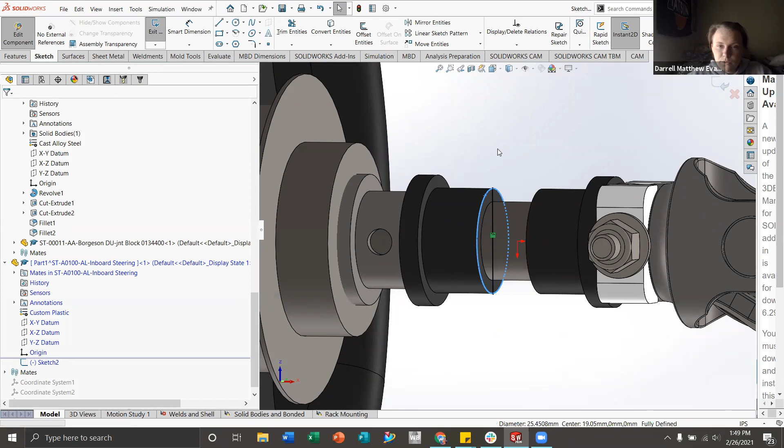Offset entities—so say, we'll go ahead and hit X.

So say I drew a box and I had my box where I wanted it, and then I hit offset entities. Now I can either, if I reverse it, do a box inside a box. This is really nice because it makes things a lot easier if you're just doing an offset. It'll automatically define everything as well. If you have a complex curve, it'll already do everything for you, so you don't have to design a lot of things. So I'm just going to hit close because I don't really want to do that.

Now, a good rule of thumb is you always want to have things constrained. So I'm going to go ahead and just select my origin, then hit Smart Dimension.

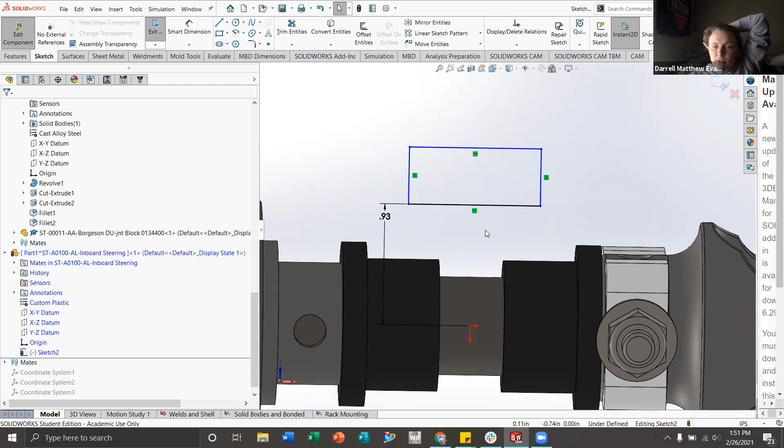So now what we saw there is this line turned black, and what you always want to do is have everything that you make turn black. At least that's what I've seen. Some people, it doesn't really matter, and I've heard from some industries that they don't really define everything. While that can be okay, I've always found defining every single thing is always better. It's always easier to follow and stuff like that. So with that, you always just want to make sure everything is constrained. And now what we can see is as I try to drag around this line, it doesn't really move, and that's always good.

So yeah, that's just adding what I call a smart dimension, which is right here up at the top. If you hit it down, you can see there's other different things, but I normally just use smart dimension because it'll automatically snap to what I like to do.

So I'm going to go ahead and delete that dimension. Instead, what I'm going to do is select this little edge right here and select this point. What I did, I just held shift. So if you shift click, what you can do is you actually select two things.

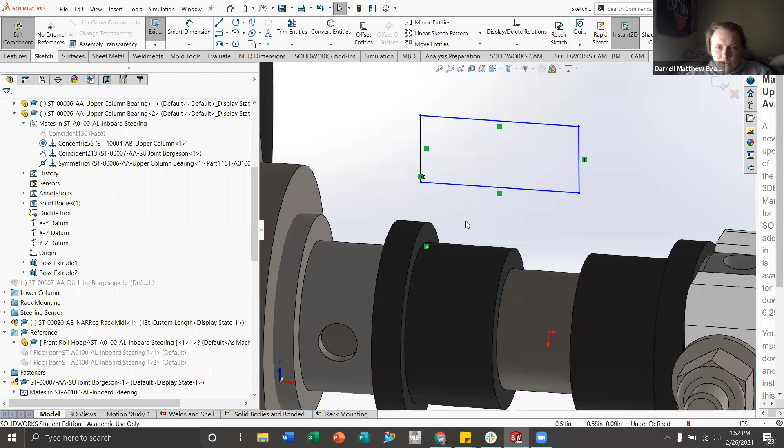And so then what I'm also going to do is select that.

But yeah, so that's how you constrain different things and stuff like that. So what I will do is go like that, and there we go. So what I just did there, you can kind of see, it's a little bit hard to tell, but I'll go ahead and highlight these guys for you. So I just highlighted it by, again, holding shift click, and I was able to highlight it.

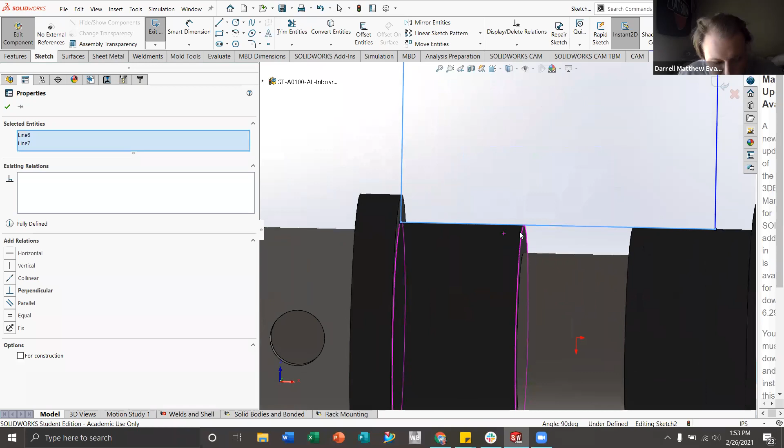Now, if we hit Control-3, which is our side view, and I scroll in here, you can see it aligns perfectly with this bearing right here. And that's just a really nice way to dimension things very quickly without adding any dimensions.

So I'll go ahead and select that edge right there. If I can select it, it's a little dark to see, and then shift click this point, and we can see this little window pops up right here, which lets you really quickly make some constraints, some sketch relations as they call them. I also call them constraints, so I'll be using that word interchangeably. But you can select different things like that as well.

On the left, it also has the same three things. So I'm just going to go ahead and hit perpendicular. And so now we can see our sketch is almost defined except for this guy right here. So what I'm going to do is take this line and this line right here, and go ahead and hit perpendicular like that. And now we've got a fully defined sketch with just a couple things.

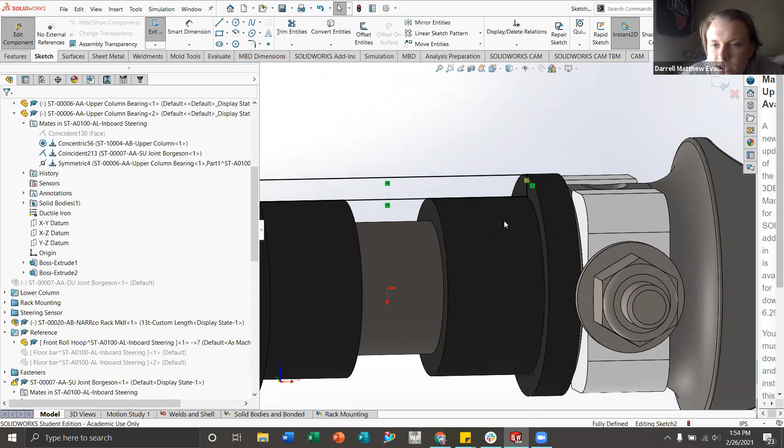And if you also notice, you can also create a rectangle with only... If I go ahead and delete this relation, it actually stays fully defined. So you only need two references, that bottom corner and top corner, and you can fully define a rectangle.

So the next thing I'm going to do is create this random line way up here, and that'll work. With this line, I'm going to create an axis in between these two right here. So I'm going to go ahead and select my origin, then shift click and select this guy right here, and make that a midpoint.

So now you can see it goes right through the middle. And then I'm going to make this guy horizontal. Then I'm going to go ahead and click it one more time. And then we're going to add, for construction, an infinite line.

So what a construction line does is it doesn't actually add anything to the sketch, but instead it allows the sketch to be defined off of this line for different reasons. And then infinite length, so I just made it an axis. You can kind of see if I scrolled out forever, it would keep going.

But what this will be used for is if we go ahead and exit the sketch, you can either exit the sketch with these two buttons up here, or right here where it actually says exit sketch. I use this one, you can use whatever one you like. All right, so now we can see we have this sketch right here.

We got rid of that little dashed line, which means everything is constrained. As well, this arrow right there means it's defined off other things.

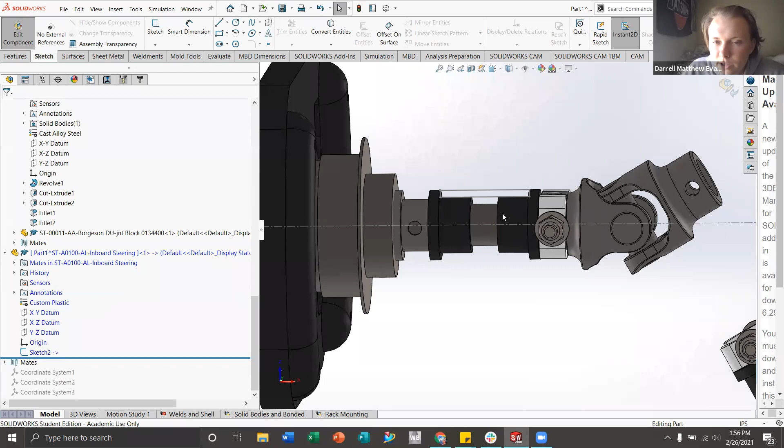So the nice part about this is, say we were to move this highlighted bearing right here to the right or to the left, it would actually extend this box with it.

So the nice part about that is, this is why we do assembly. This is called assembly driven CAD. And so as you change your assembly due to whatever other things, it'll then move this part with it. And so everything should update off of itself, which is very nice to have, but also it can be tricky at sometimes.

So there's a little bit of an art to it, but once you kind of get the hang of it, it's really nice and it works a lot better, makes yourself more productive, because changes that you make later down the line, instead of having to redo everything, it just will auto update.

Which is pretty cool to do. So now what I'm going to do is, say you didn't have anything selected, what you could do is you could hit feature, revolved boss base, and it'll ask you to select something. So what I like to do is I'll just select my sketch beforehand.

So now you can see it's highlighted right there. I'll go ahead and hit revolve boss base. And now you can see a preview of it. It revolves it all the way around.

And so with the revolve, you see you have blind. There's different things, so maybe you want to only go up to a surface or some other stuff like that, you can do that as well. Say it was a little bit more complex, you could do direction 2, so you could have it go one way and then go the other way as well.

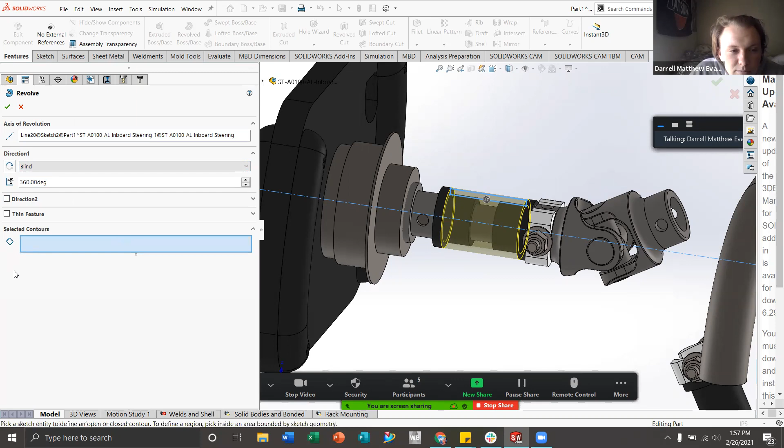Thin feature as well, sometimes it's nice, selected contours. So say you didn't want this whole thing, or you had like a hole in it or something like that, you could select only the parts that you want, but I want this whole thing. And as well, I want it to go 360 degrees, so that is perfect for me.

And now you can see we have this nice thing right here, and that is right around it. So if we go ahead and right click it and we go change transparency, it should... oh, there we go.

So now we can see we got our part right around it, and it's right over these bearings, and we got that tube, and it should be able to let the tube in. So we'll go right click again and just hit change transparency to make it like that.

So yeah, awesome. So now what we're gonna do is we're gonna make those tubes that now connect from this guy up to here. So what I'm going to do now is...

Or I guess, does anyone have any questions as of right now? I feel like that should have covered most of the basic stuff. So I think now would be a good time if you had any questions.

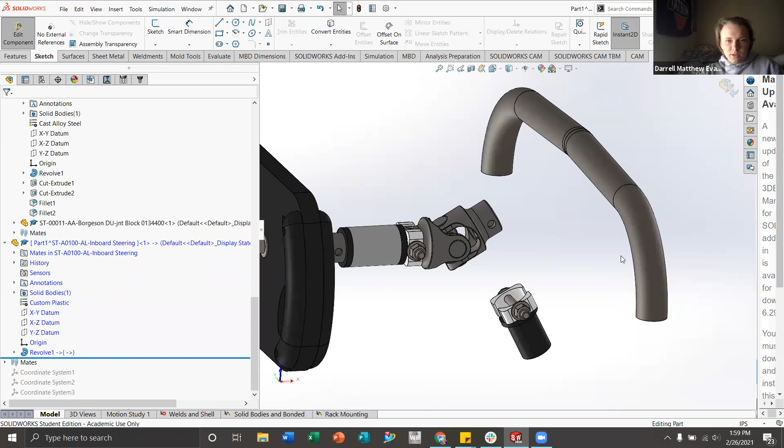Yeah, but I hope that gave you a good, I guess, idea. Oh, I think no one else is in here. Okay, never mind.